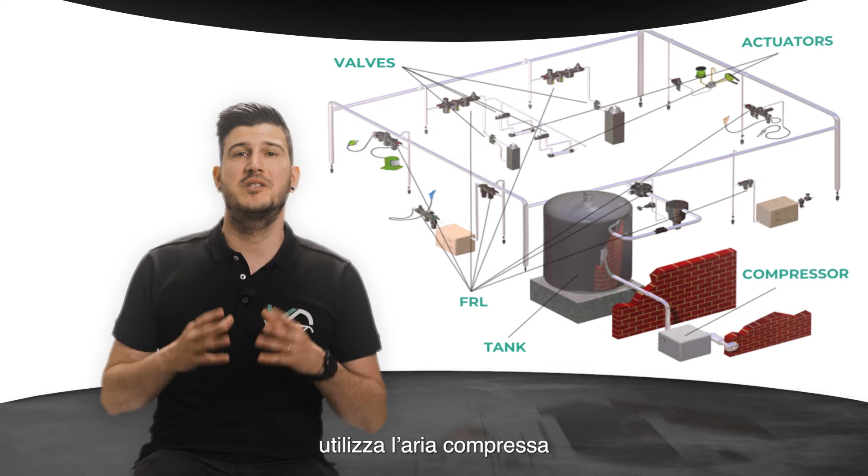Then the air goes all across the grid, which is a system of tubes and piping bringing the compressed air all around the factory or the plant. Then we have the valves. The air goes through the valves, which decide the direction and the way of the air to the actuator in order to make the movement. Valves can be controlled with electric signals, with manual signals, or with mechanical signals. The last component, of course, is the actuator, the cylinder, which is the element that actually takes compressed air and turns it into force to do the job for which the machine is designed.

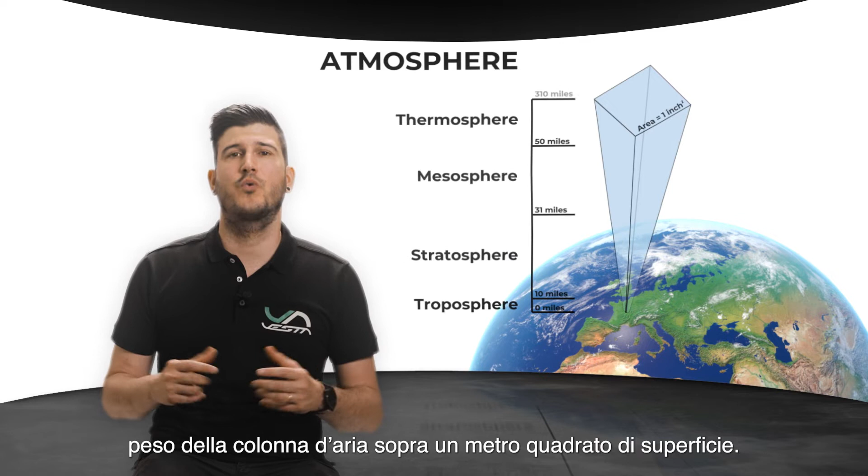Now we need to ask ourselves a question. What is pressure? Pressure is a force against a surface. So in the case of atmospheric pressure, it is the weight of the column of air on a square meter. So it is the force of the weight of the air on top of all our heads. At sea level, in regular conditions, the atmosphere is 1 bar. So we all live in a 1 bar atmosphere.

Now we need to get familiar with the concept of flow or flow rate. Flow is calculated in liters per minute, the amount of air that is flowing through a system every minute. And it's usually calculated in normal liters of air, which means air at the standard conditions of temperature and pressure.

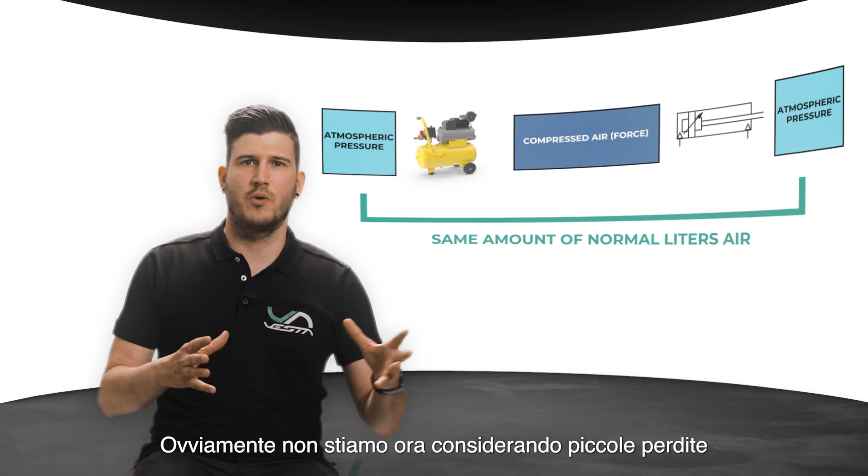Of course, we are not considering here small leakages, losses, or other things that can happen that make the air go loose. But in general, the same amount taken from the atmosphere is the one exhausted by the actuator. So what is the relationship between bar and normal liter?

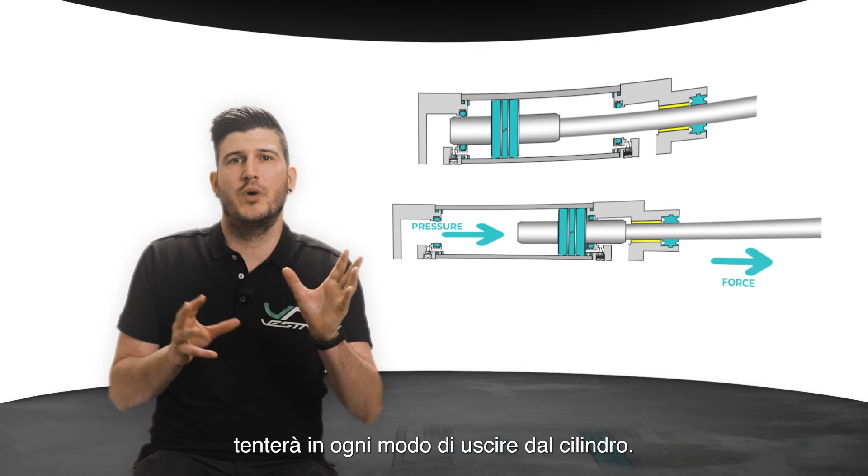So this is how you can use compressed air to generate force. But we're not here to play games and make balloons explode. So what if we take compressed air and we put it inside a full sealed aluminum or steel body, which is called cylinder? You will see that compressed air will try to escape from everywhere. If the cylinder is well sealed, the only place where pressure can express its force is on the piston, which can actually move. So the pressure of the air against the surface of the piston will generate a movement, therefore a force.

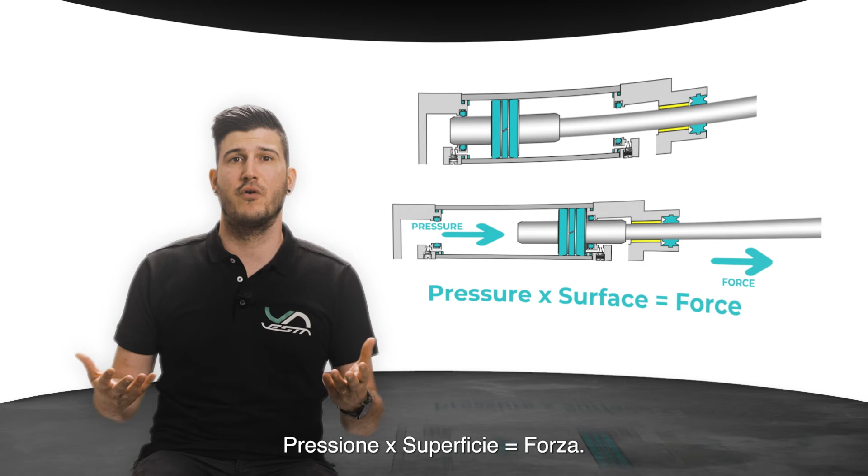Pressure multiplied by surface equals force. This force is expressed in newtons. 1 newton roughly corresponds to 0.1 kilogram force. So if we know how many kilograms we have to move or lift, we can understand how much pressure and how much surface we need in order to generate that force.

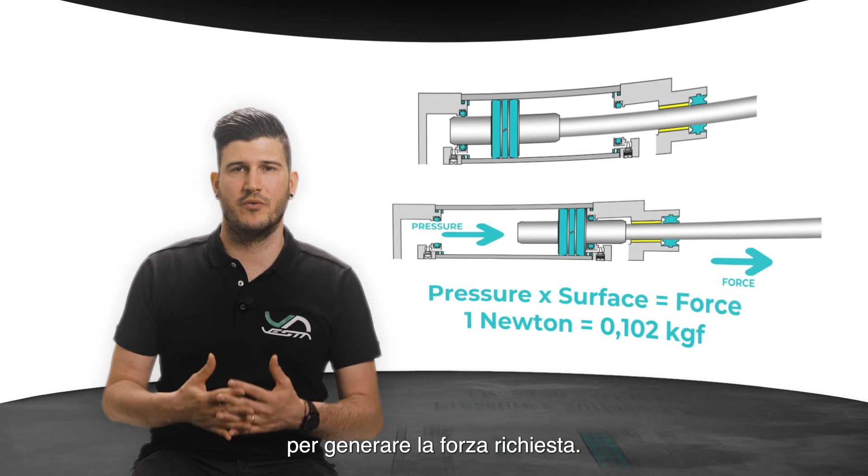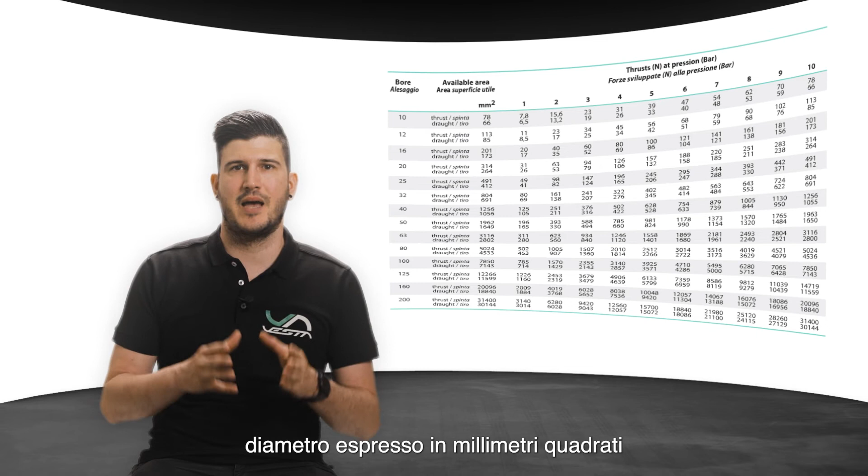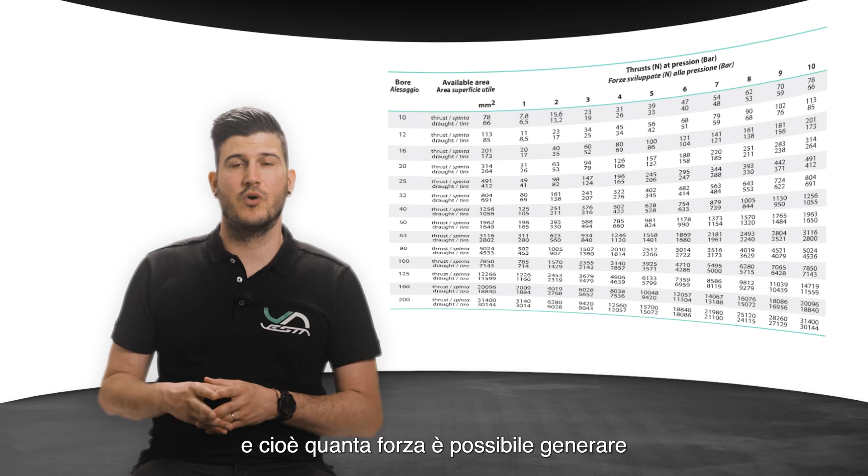If you look at this scheme that you can find in our catalog, you can see the relationship between diameter in square millimeters and pressure expressed in bar. And you can see how many newtons, so how much force you can generate with a cylinder of a certain dimension and a certain pressure. But don't worry, we will get deep into that when we'll actually explain how cylinders work.

Now let's take a little step back to try to really understand the relationship between pressure and flow. So we said that in a pneumatic system, the force is always related to the pressure and the surface. The speed of a cylinder is always related to the flow rate, the amount of air per minute. So if we can control the flow rate, we can therefore control the speed.

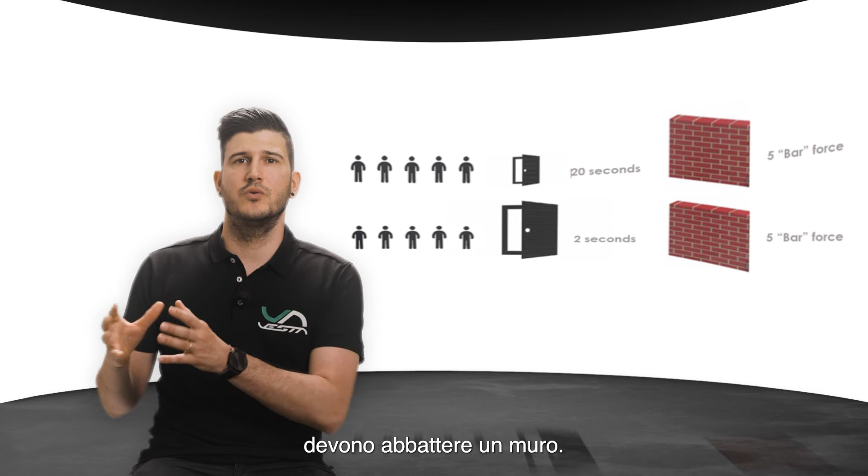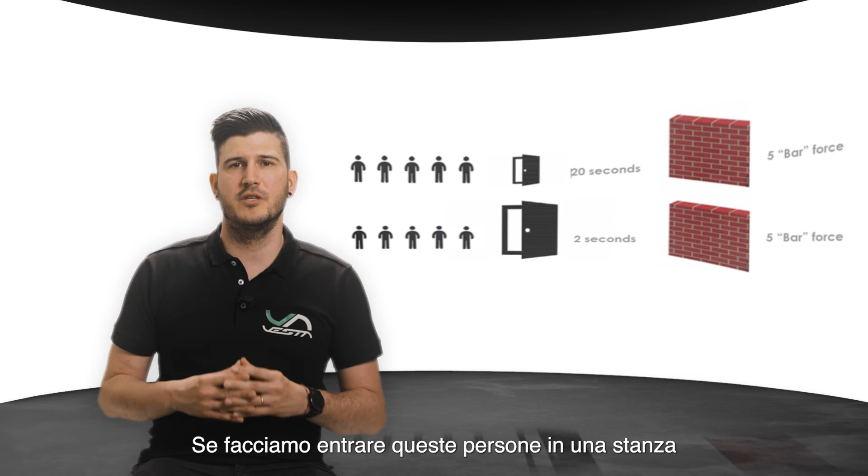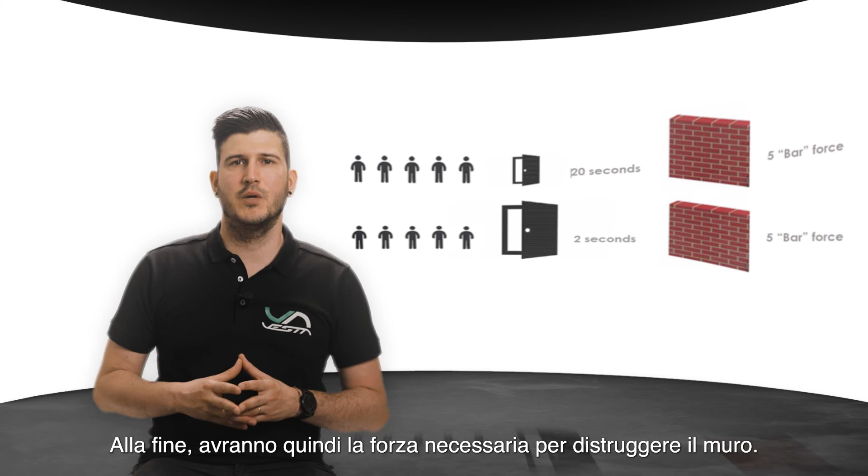Here's an example. We have 5 people, and these people are needed to break down a wall. So let's pretend these are 5 bar. This is the force needed to push down the wall. If we make these people enter the room through a small door, they will take 20 seconds. It will take time, so it will be a slow movement, and at the end they will have the force to push down the wall.

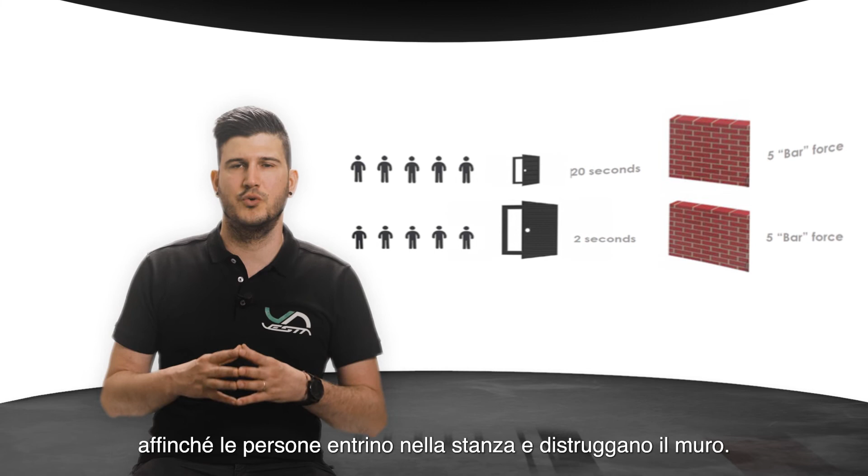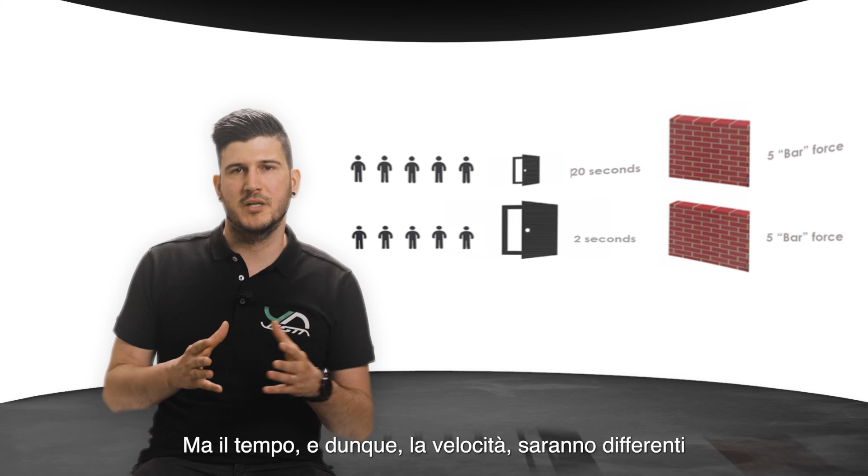If we make the door much bigger, it will take 2 seconds for the 5 people to enter the room and push down the wall. So the force will be the same, the force to do the job of breaking down the wall. But the time, therefore the speed, will be different according to the flow rate, which is determined by the size of the exhaust. So we have these objects called flow regulators or speed controllers.

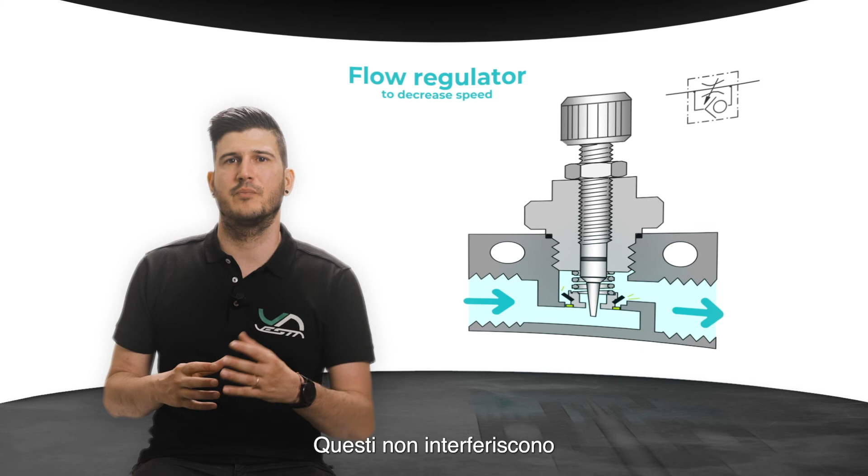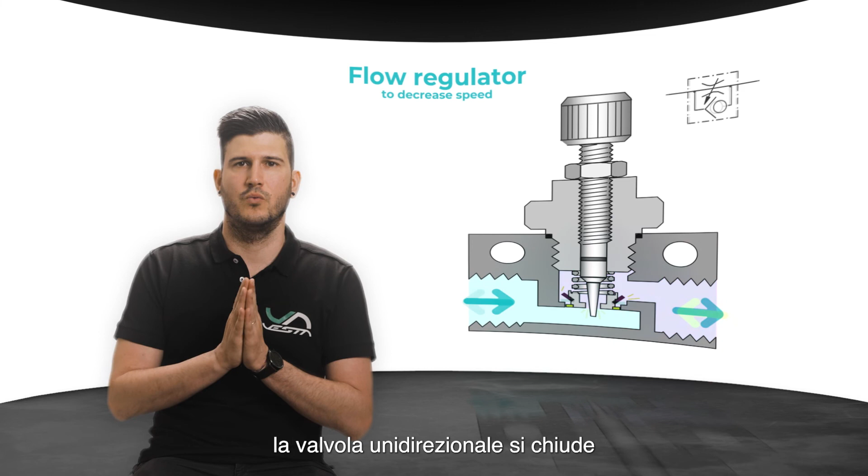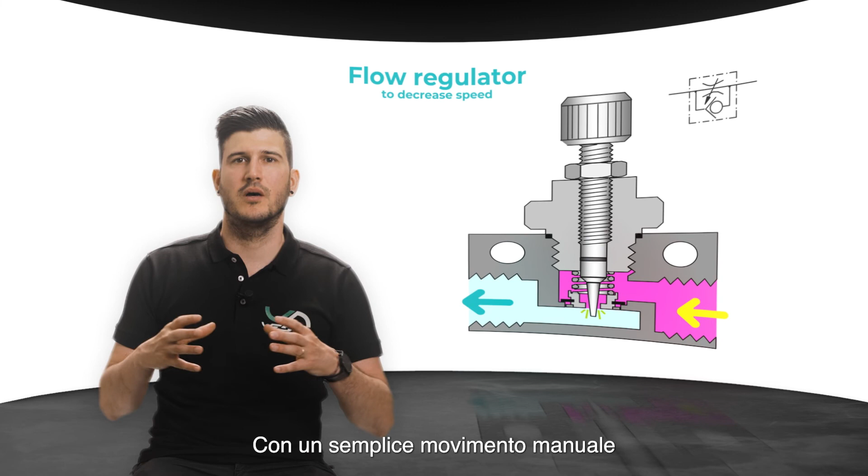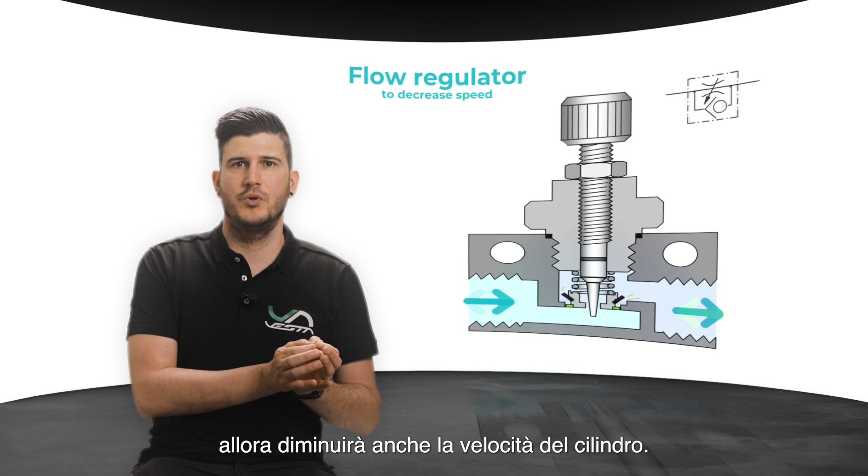When we provide pressure to the cylinder, they will not interfere. But when the air is exhausted from the cylinder, a one-direction valve will close, and therefore it will force the air to pass through a hole. By a manual movement, we can control the opening and closing of that hole, therefore controlling the speed of the cylinder. Less air going out means a slower movement of the cylinder.

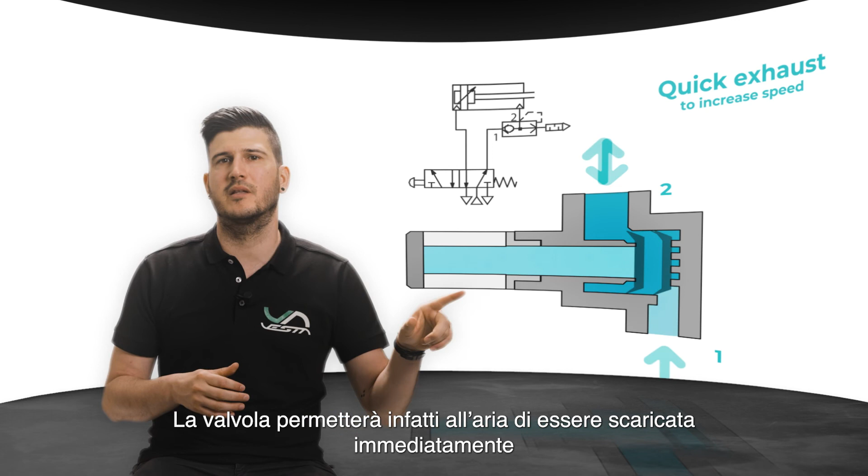Funny enough, we can also increase the speed of a cylinder or of a pneumatic actuator with a quick exhaust valve, which will work in the opposite direction. It will allow the air to get exhausted immediately from the cylinder, rather than going back to the tubes and the valves. In this way, we can increase a little bit the speed of a pneumatic actuator. This is how we control the speed.

In order to control the force, we will need pressure regulators or precision pressure regulators. But we will find more about that in our video dedicated to Vesta automation series of pressure regulators.